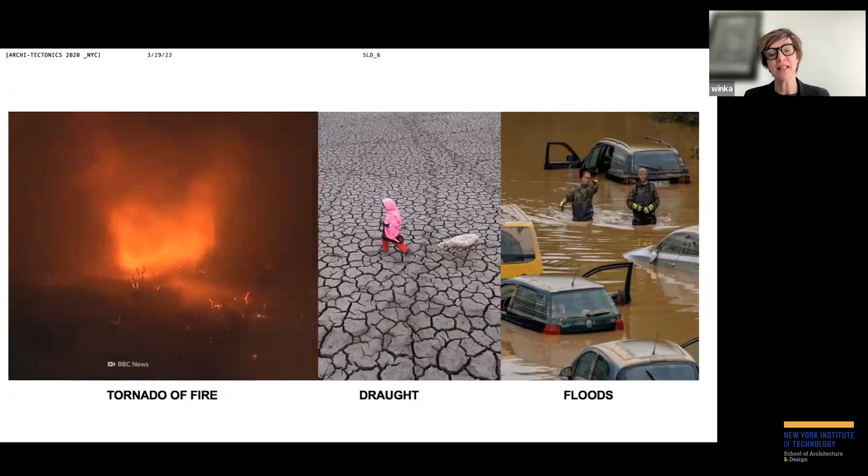It's not a manual—it is a manual, and it reflects the non-standard way we're working. Essentially, the non-standard way started very early on and was a little bit related to what we call the Anthropocene. The Anthropocene, as we know, has strange effects from tornadoes of fire to droughts to floods. So why can't we control that this water travels to countries that need it and the other way around?

We think partially as architects, we have a small part where we can maybe add some intelligence to this problem, thinking about buildings with smart skins, passive energy sources, prefabricating, which means it's clean and fast, and using renewable sources.

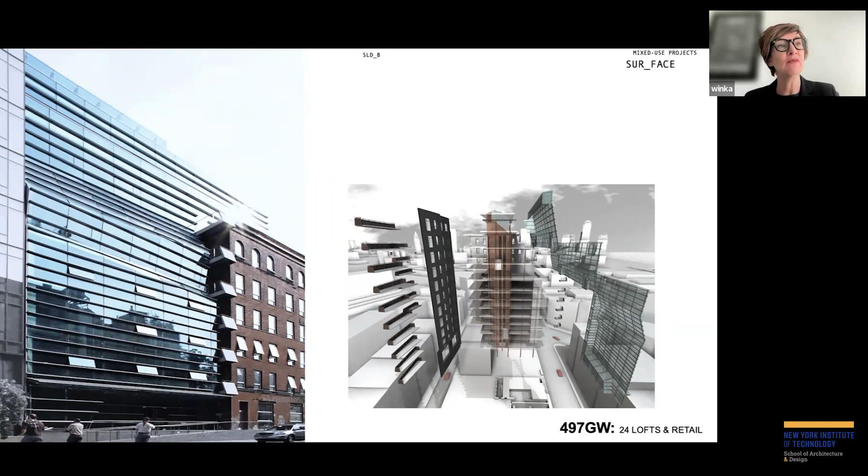So I'll walk very quickly through some earlier projects. This was a project we developed actually in the late 90s, was built around 2000. And was maybe one of the first parametric projects where, instead of construction drawings with dimensions, we sent a 3D model around with XYZ points.

We did this because the glass was extruded in Spain, the mullions, the glass was folded in Spain, the mullions extruded in Hong Kong, and the whole thing was unitized in Brooklyn.

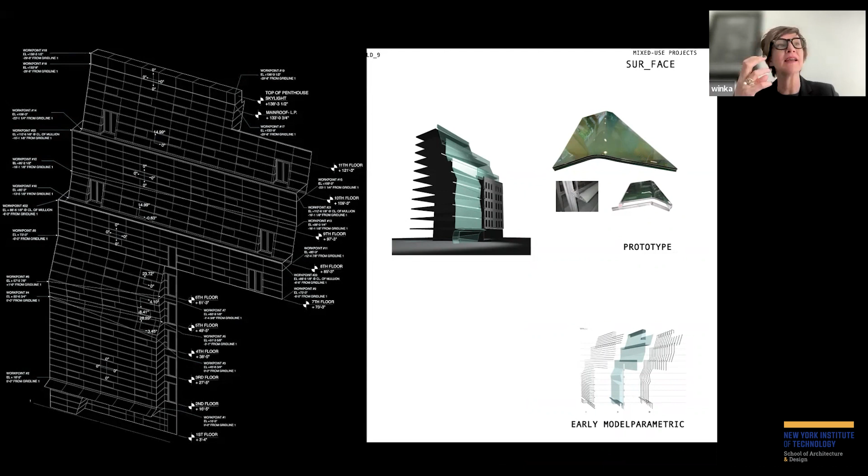Now, not only did we do that, we also felt like we wanted to challenge the original or maybe standard curtain wall notion, as this was more a customized version. And we separated the vertical and horizontal mullions in a way that on the outside, it doesn't look like grids, but like horizontal bands. This project was a very interesting one.

And the last one was also passive solar. So this is a later one.

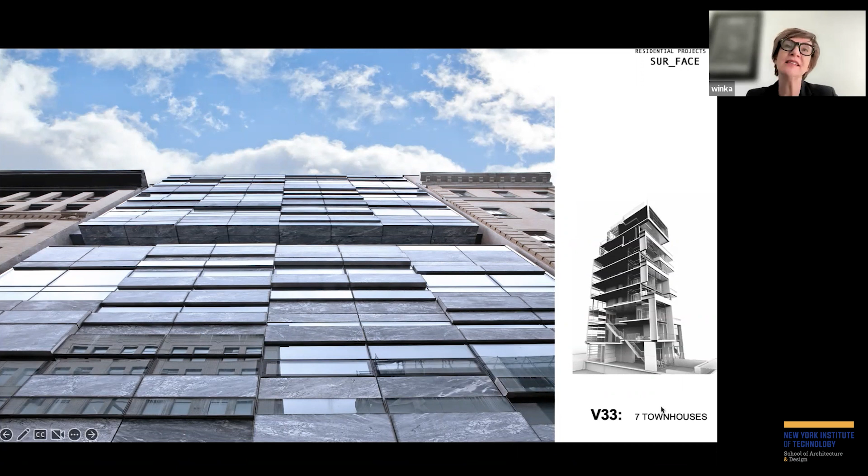Now we're moving in 2010, and this was a pixelized facade, really responding to the fact that the building is in a landmark district. And it's stone, translucent stone, glass, and translucent glass, optimized towards the north street facade with this glass and stone, and towards the south, where you have the garden with very deep balconies, which provide natural shading, and also, of course, outdoor spaces, which is rare in New York City.

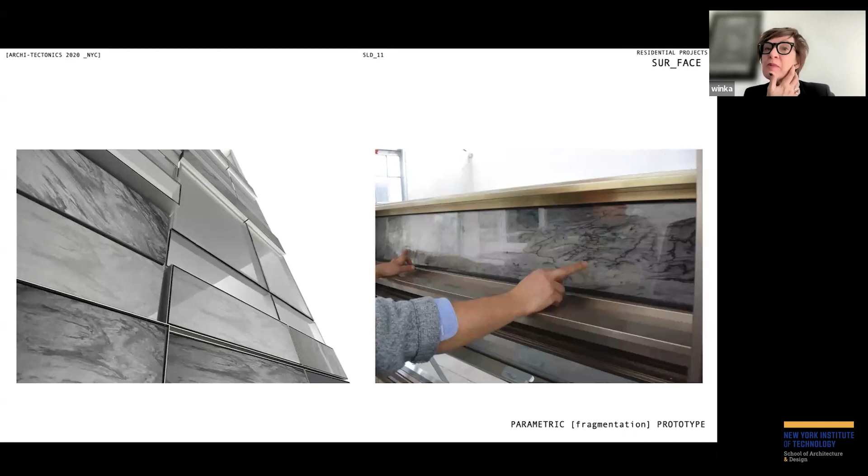This parametric facade started to show something which we have been doing from the beginning, also in the folded glass one, where we moved away from working directly with contractors. We started working directly with manufacturers, and that also embeds, instead of model making, we started to make one-to-one prototypes.

So here we're looking actually at a one-to-one prototype of the facade in Italy, where, as you can see, the mullions are ultra thin, the stone is translucent, and the facade is a 3D pixelation. This was in response to a question of landmark.

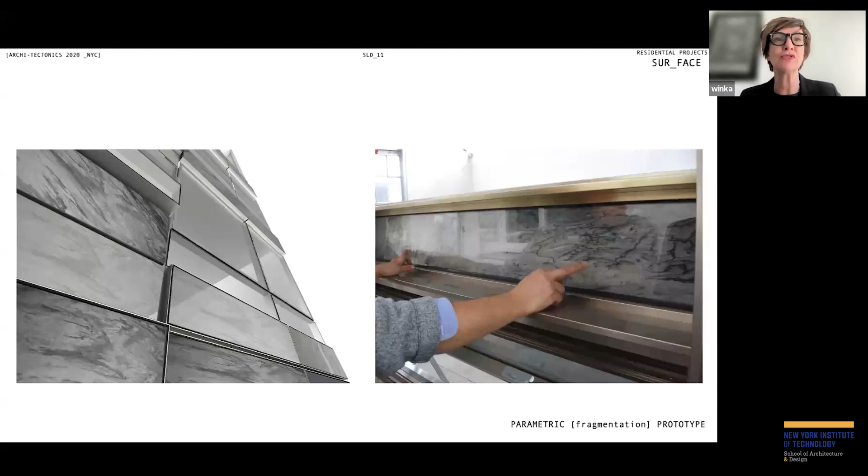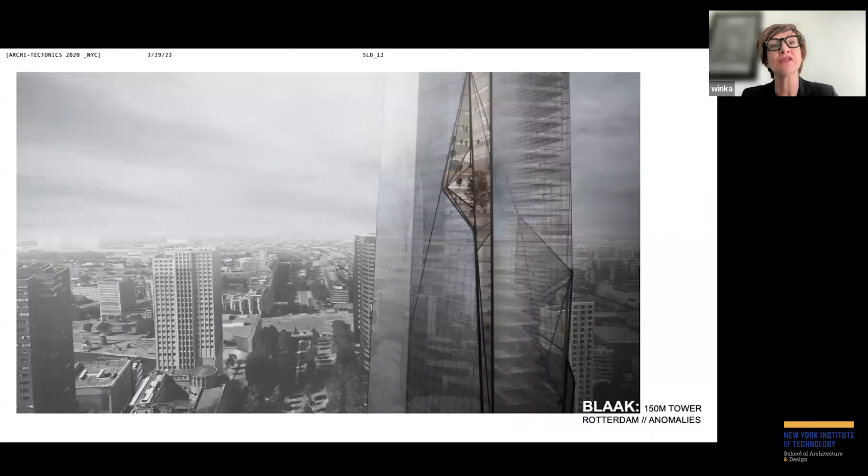Moving more towards the future, this is a tower we're working on right now in my hometown, Rotterdam, in Netherlands. 150-meter tower, where we start to look at the idea of sky lobbies as green lungs.

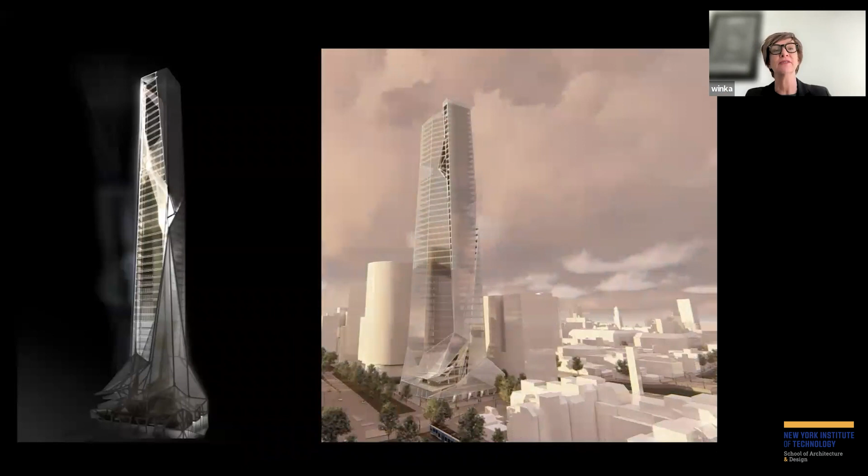And then a frit will allow the south facades to stay cool, a silver frit on the glass, and the north facades to stay transparent.

So then we move into one we just finished, a little tiny guy. So here you can see the difference in scale, actually, that we happily embrace. Our office is not traditionally going from tiny to large. We actually like to switch the mini with the mega.

And then this is the mini and the mega I'll end with. So this was actually a 4-story townhouse. We added 4 stories on top of it.

I said to the office, this is starting to look very out of proportion. Maybe we need to add a 3rd building to create actually something completely new.

And this is where the climate skin came in, which is a trellis, a solar trellis volume, really, not a facade, but a volume.

Which wraps the front kind of balconies that are leftovers from the fire escape that used to be there, and then wraps all the setbacks of the new extension and also the roof terrace and the back.

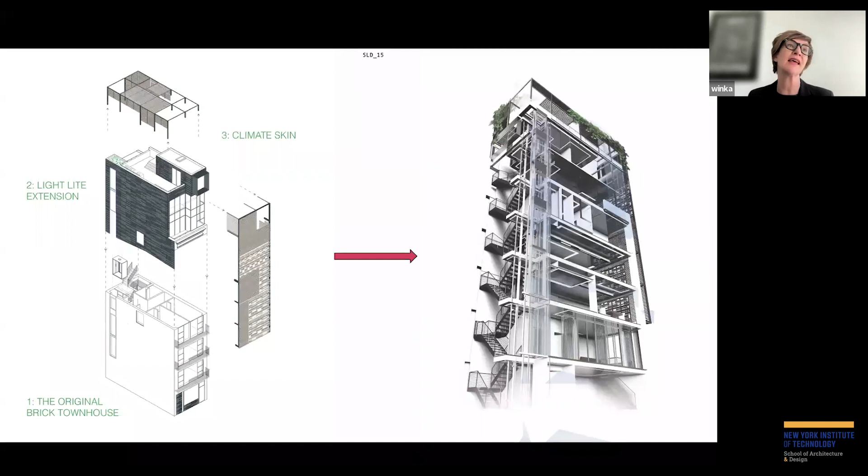So in the back, as you can see here on the right, is actually a glass elevator and stairs, because this 8-story townhouse is just for one family.

Here you see the front with the trellis, and that's on the right. You can see it's openable. And that opening we felt should be a transformation.

So we call it feathering. It's basically inspired by a bird wing, where if the bird flies, the feathers are completely aligned and very streamlined. But then as it sits down or it lands, then the feathers get spread out.

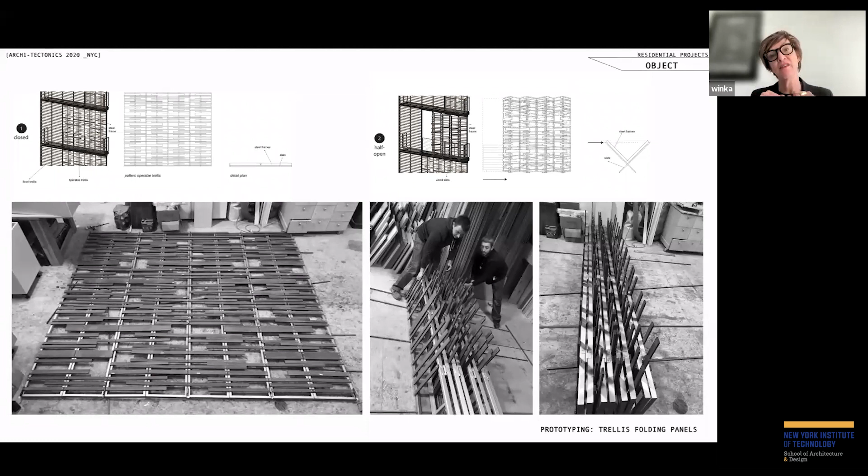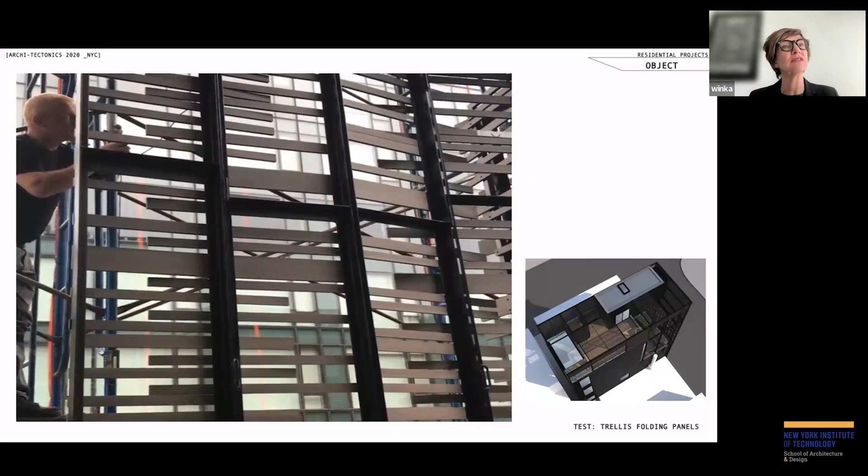So we did the same thing here. As the trellis is closed, you see here the fins move flat in space. But as it opens, it folds out. And here we're actually using an actuator to see whether we could automate the top levels.

And here you see a small close-up of how this looks for the facade, and you see the balconies. So quite beautiful is that this facade actually saves 45% energy reduction over the year, simply by opening the trellis in the winter and allowing passive solar in, and by closing it for shading in the summer and not overheating the building.

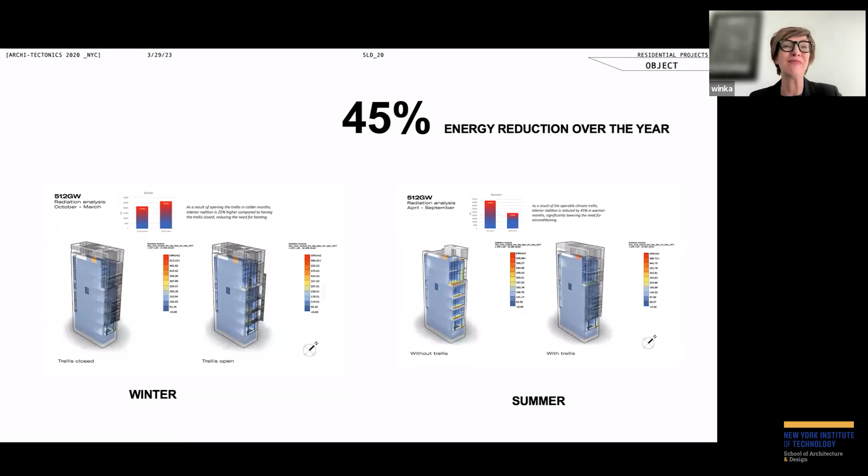A very energy efficient method, as in not using any energy. And then if we're up in the extension, you start to see the doubling of the facade.

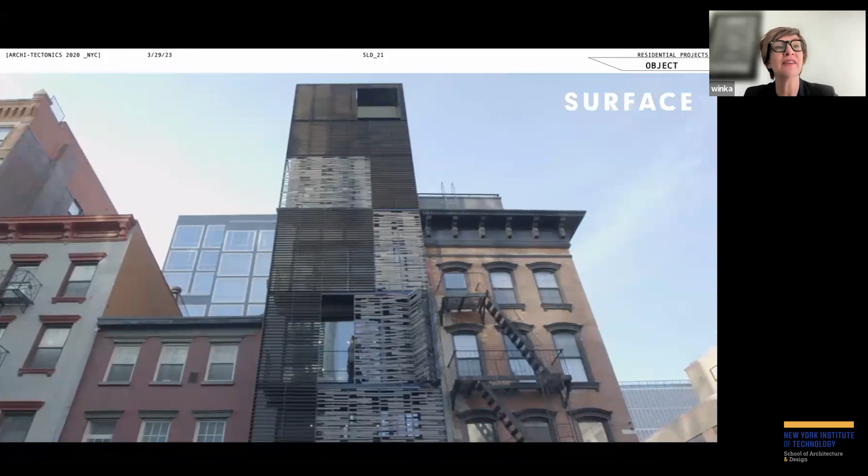Here I'm standing on the remnant of the fire escape that you still see on the right of the neighbor. So the right neighbor is actually more or less how our building used to look before we added this kind of towering trellis. On the top, what you see, that square window is actually a meditation corner.

It looks out over Soho in Manhattan. You can find both these buildings on Greenwich and Spring in Manhattan. And then the beauty is, of course, a 3D trellis that you find this room on the top, which is really a roof terrace, but very private.

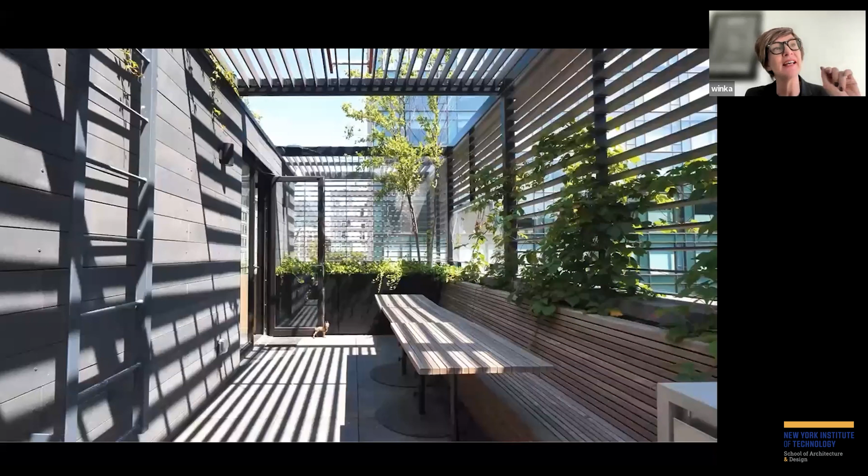The weirdest thing about roof terraces in New York is they get very, very hot and they're very, very unprivate. So here we allow plants to grow over. On the left side is the little bulkhead that contains a bar and a kitchen, and has a vegetable garden on the roof. You see the little ladder going there. So it's like a little green oasis.

So going back to the Anthropocene, when we look at the climate as it is now, nearly 50% of the US population, an estimated 150 million people, live in areas that don't meet federal air quality standards. Particulate matter is single-handedly responsible for up to 30,000 premature deaths every year. According to the latest World Health Organization report, 8 million people die every year globally because of air pollution.

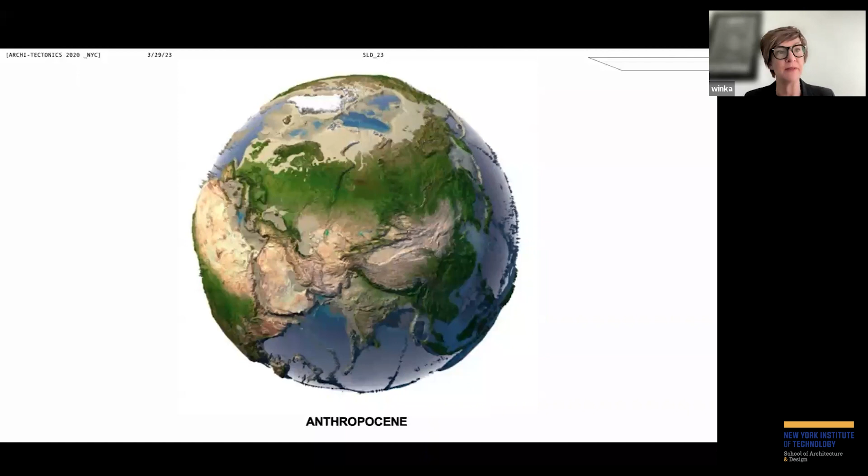Basically, radical mutants, or hopeful monsters, as they're called by geneticist Richard Goldschmidt, who relates this to evolutionary biology, means that these flowers undergo fasciation or cresting, a relatively rare condition of abnormal growth in vascular plants in which the growing tip, which normally is concentrated—a flower is typically symmetrical—starts to produce cylindrical tissue elongated in the direction of growth, creating these flattened ribbon-like crested or elaborately contorted tissues.

Now, why is Richard Goldschmidt calling these hopeful monsters? He does that because he realized that the mutation actually allows these flowers not only to create this very strange beauty, but also to survive this stress in the environment.

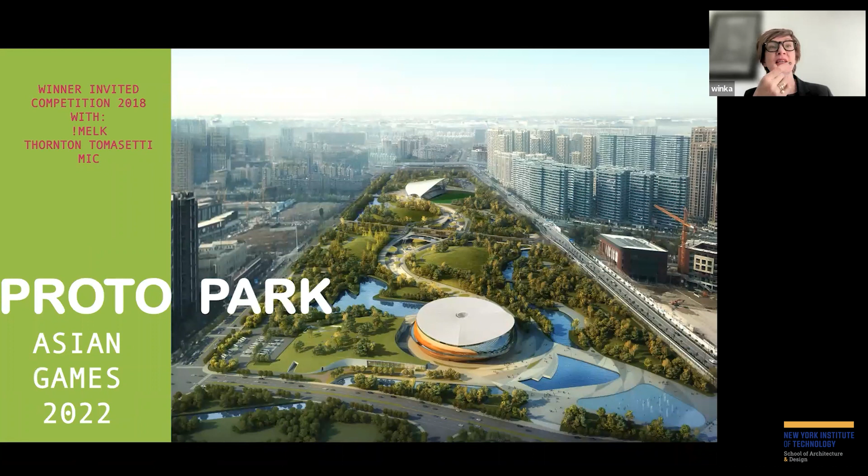We call it a proto-park because we don't see the park here as a park just for the Asian Games. You have to think the Asian Games are the Olympics of Asia. And essentially this 116 acre park is 1.6 kilometers, or almost a mile long. As you can see here, it has 2 stadiums.

Now, there's a few interesting things we did to change the dynamics of making a stadium. As you know, a stadium is usually kind of a white elephant in the city. It is really active for a very short amount of time, causes traffic jams, massive overload on the neighborhood, but then it stops for most of the year.

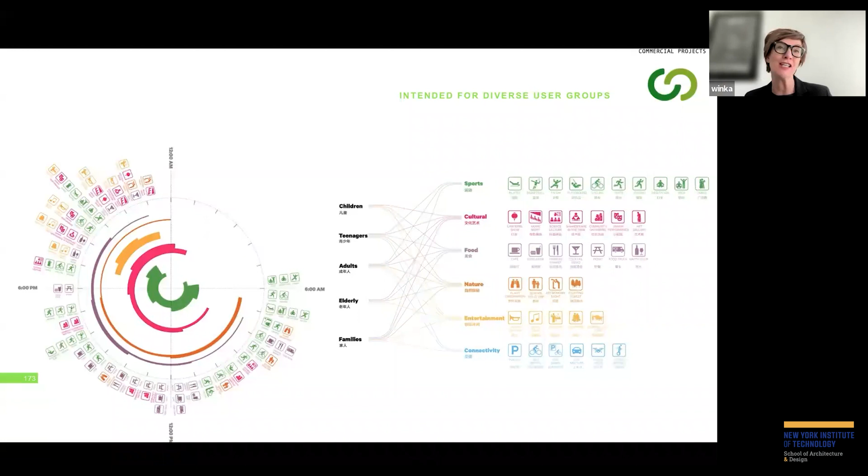So we proposed to the client to actually look at both the park and the buildings as something that would have use after the games. We were, of course, a bit opportunistic here because we were interested in making more interesting buildings than just a stadium that is a bit of a one-liner, in the sense that what you see on the outside is what you get on the inside. So here you see the evolution of our thinking about the park.

This was designed, the master plan was co-designed with Melk, a landscape architect here in New York City. On the left is what they asked. We broke the rules. They asked us to put the 2 stadiums on the bisecting road and river in the middle.

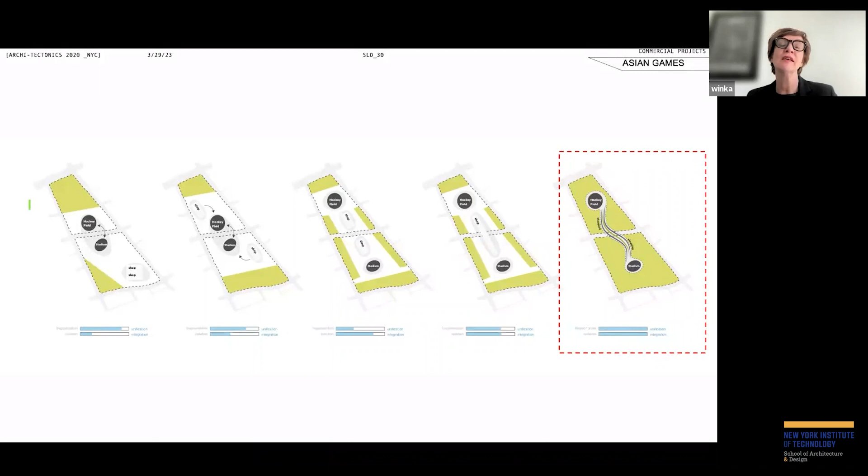We realized if you do that, the park becomes the backyard, so we proposed to put the stadiums in the centers of each half of the park, allowing them to be connected by what we call a valley, a shopping valley or valley village, a 530-meter long shopping corridor that goes under the river, now an aqueduct locally, and under the road, connecting the 2 stadiums as one activity network, and also because that artery would activate the park long after the Asian Games are gone.

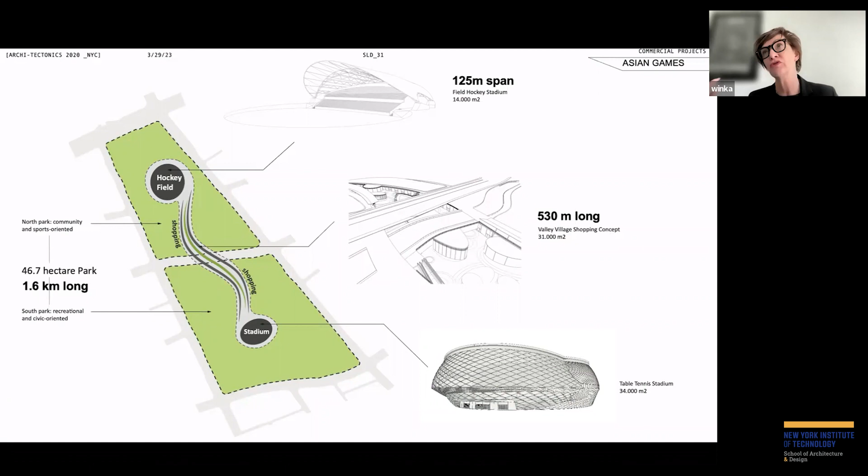On top you see the field hockey stadium with a spectacular 125-meter span solar wing, and the table tennis stadium that is a hybrid concert hall of 34,000 square meters, about 350,000 square feet. Here you see how this looks now. It's extremely green already.

As you can see, the aqueduct is in play, and we have these long loopy pedestrian bridges going over the river and the road as well. The road is actually quite a large road, a 6-lane highway, which in China is quite normal. We're in the center of the city, but they tend to have really large roads.

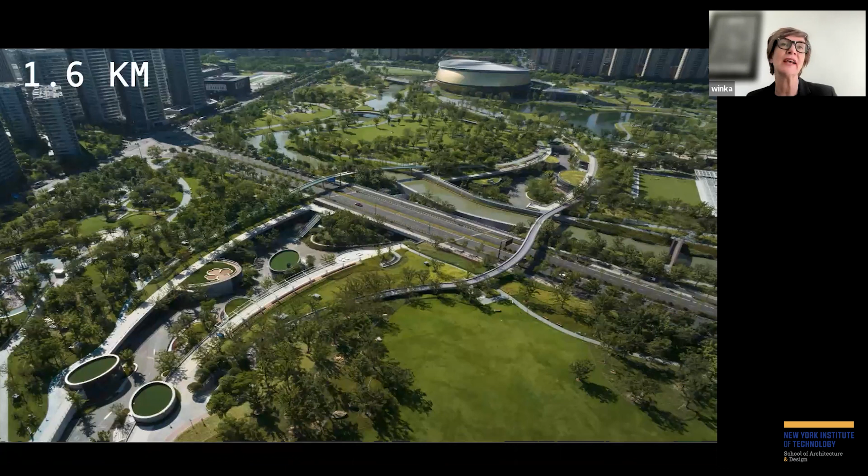The shopping valley has these pavilions with green roofs and solar wings that give the solar energy for the valley village, so it's always lit.

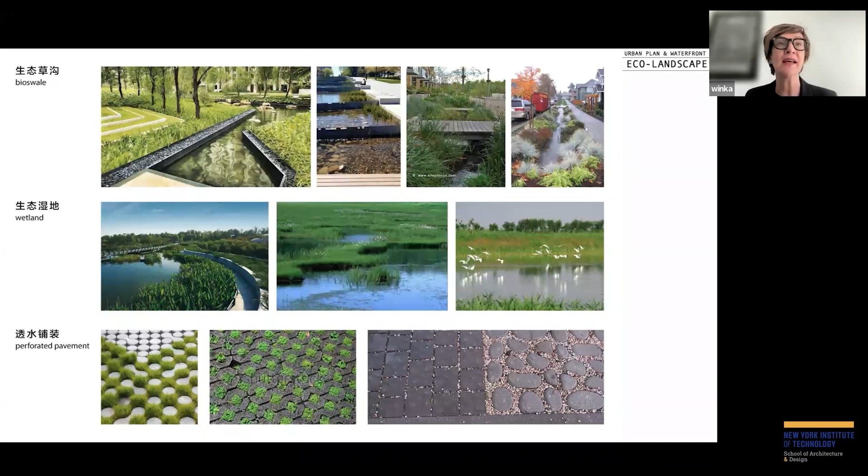The park itself we developed as an eco-landscape with bioswales. We reconfigured the wetlands that had almost completely disappeared in the area, and we use only perforated pavement so that the hardening of the city around is absorbed here. The water is absorbed here and also retained for the future, so there will be water when it's seriously dry around.

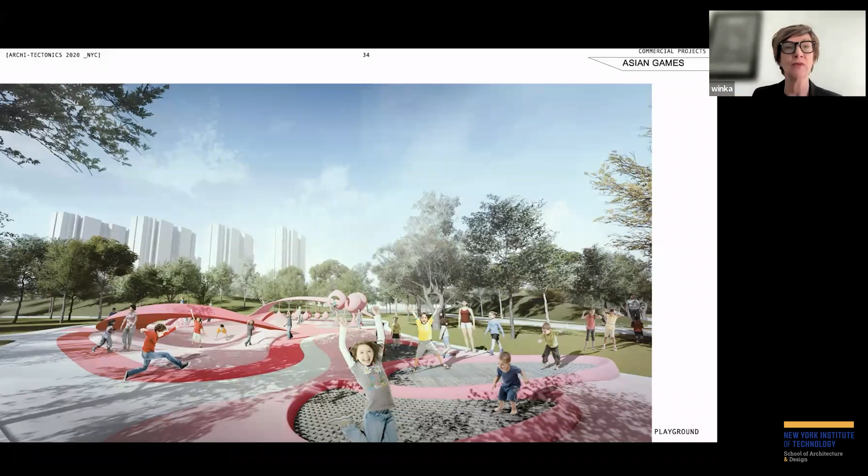And because it's a park for the future, it has playgrounds, outdoor arenas, sport fields, and all kinds of other things. As you can see here, people are actually currently camping in it. It was quite a lovely set of social media images. On Chinese social media it's quite hilarious to see what people are currently doing in that park.

The Valley Village retail, as I said, is extremely long, about 200,000 square feet. Here you see a bit of the structure of the solar awning and how it connects to the lower pavilions.

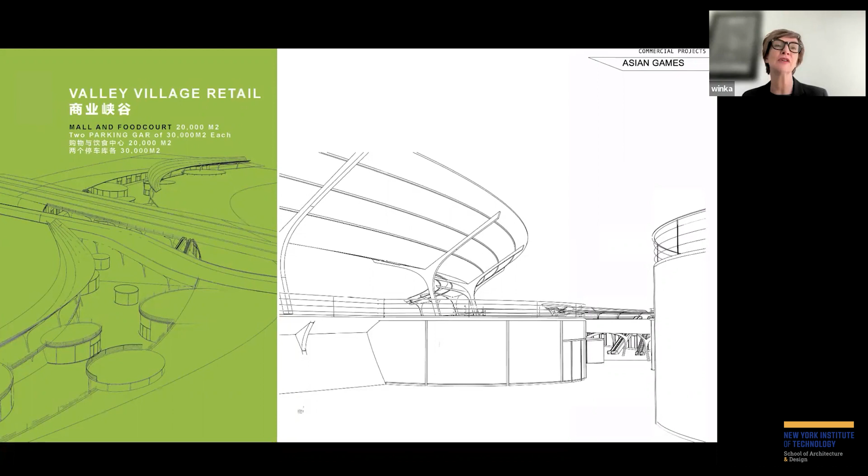Something else we used, another sustainable method, is the zero earth strategy. It's a super simple method: when you excavate the wetlands, the new wetlands and the new Valley Village, rather than removing the earth, we leave it on the site, allowing the parking garages not to be so deeply recessed.

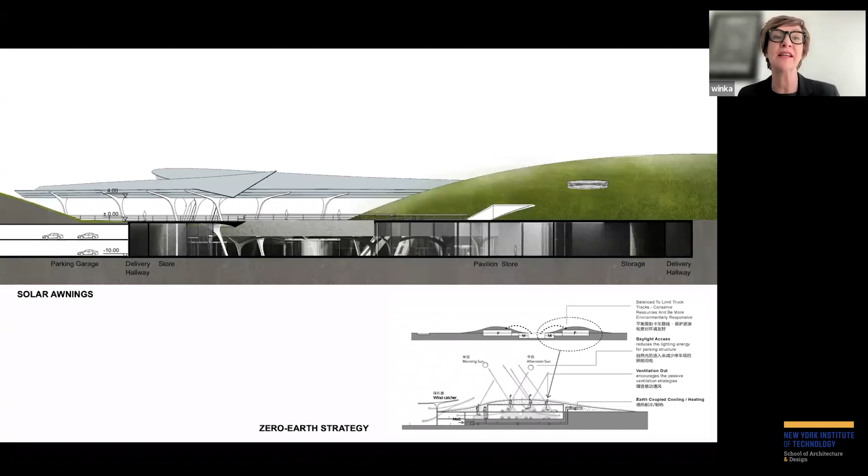One thing I didn't say is that it's not just two stadiums and a Valley Village—there's also 2 parking garages, a visitor center and a fitness center. So it's actually 7 buildings and a park. Here, sometimes we have up to 20-meter, 60 feet high hills, but in the hills you'll find little skylights to allow for natural air and ventilation in the parking garages, and also for the fitness centers.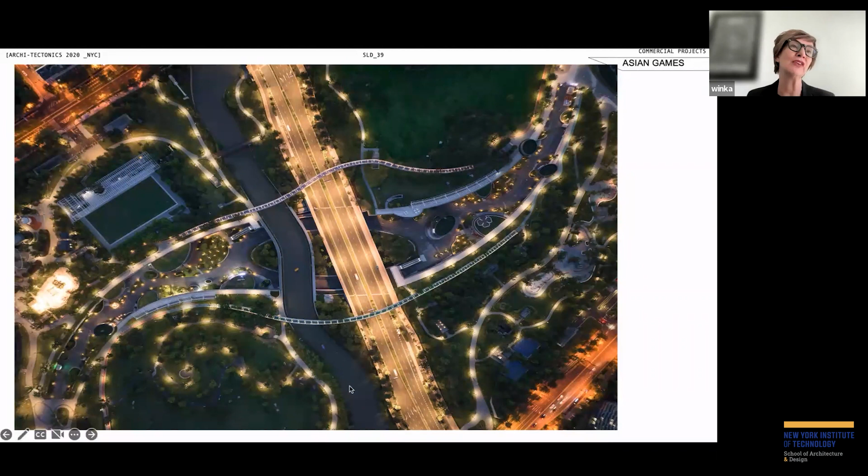I've been thinking why this happens. I think one reason was that we proposed hybrid buildings for the future, so we were allowed to invest more money. The second was time pressure—they just didn't have time to change our drawings, so they had to build what was on the drawings. Also funny is that I drew a curved line, for the same lack of time, just following the river as it naturally went, and they actually literally built a curved aqueduct. That was a bit of a surprise, you could imagine.

Then here we're down in the Valley Village. We have not escaped the Starbucks that has landed here already, and it is majorly used already. Now we're on the higher level looking at the solar wing as it is starting to collect energy. It's a solar film, so it's also slightly translucent.

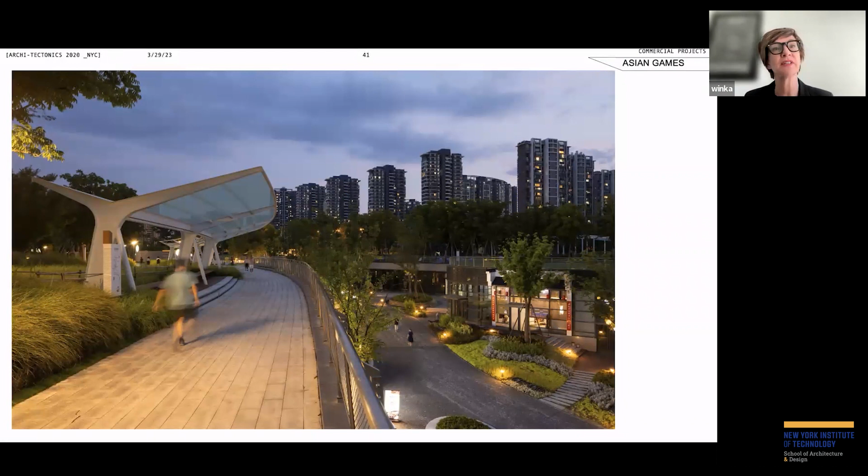So the stadium design, as I said, is a field hockey stadium, outdoor. We decided, as everything is hybrid, to also make this building more of a topological or topographical landscape feature by recessing the field in an oval 5 meters deep in the site where the seating is, then tilting the landscape up around it so that at the other end it's actually flush with the path.

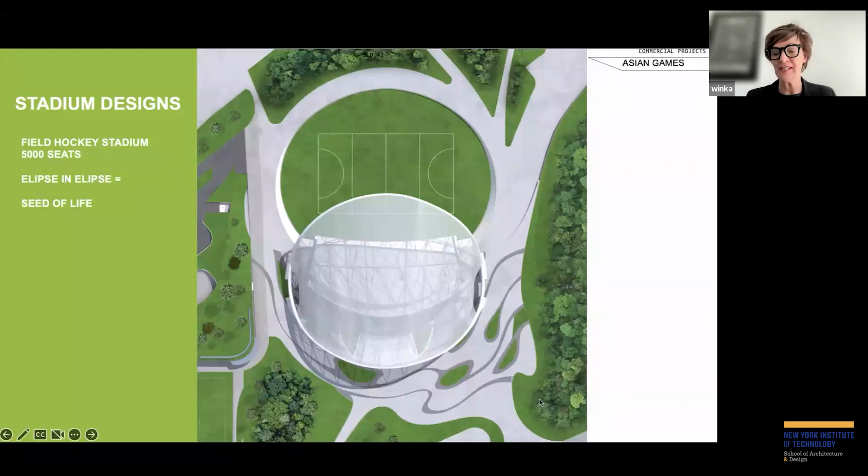It's a 5,000 seat arena. This ellipse in ellipse, as you can see in the roof, is an ancient diagram called the seed of life, which is kind of nice as a thing to know. And the building is a very simple design.

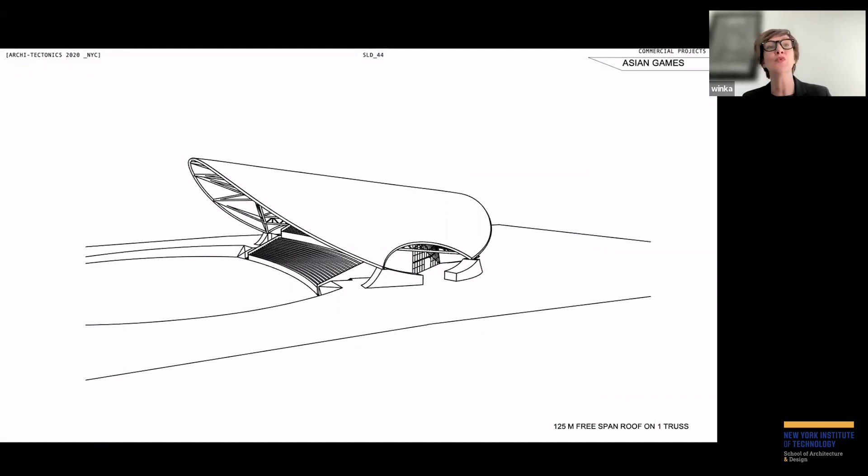We curved the arena for better viewing angles, and then the area under the arena really became the lobby, and we curved the facade with that. It's covered by this enormous wing, 410 feet in one span with one truss, with a very light fabric on top of it.

What is actually interesting is that rather than worrying about the structure of it, we had to worry about it not flying off. So these concrete abutments you see here are really to hold the thing in place rather than having it fly off.

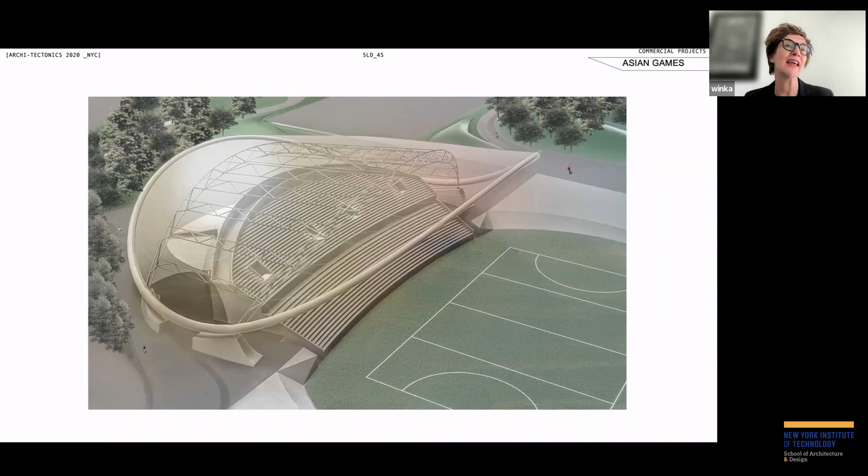As I wanted mostly cables in this roof, the engineer explained to me I had to put a tension ring around it. At first they said I might not want that, because the ring goes from 1.5 meters to 1 meter diameter, which is 5 feet to about 3.5 feet, which sounds enormous. But when we drew it, because it's almost 400 feet long, it turned out that was perfect in proportion. So we said, go right ahead, we love the ring, let's do the ring.

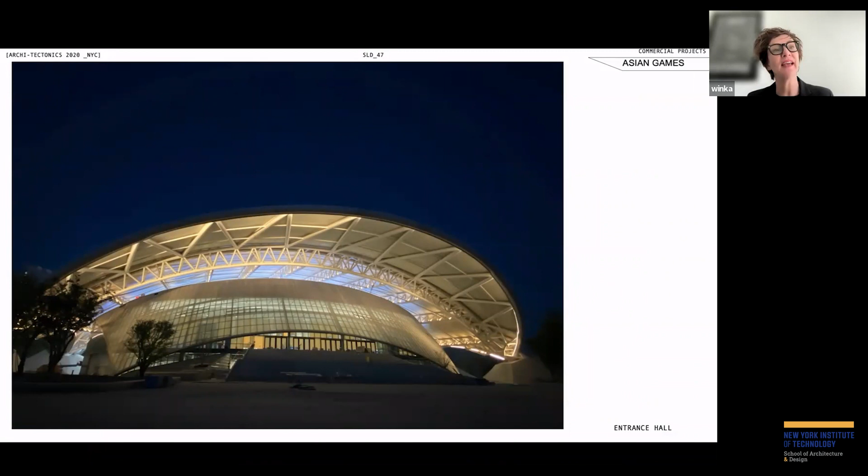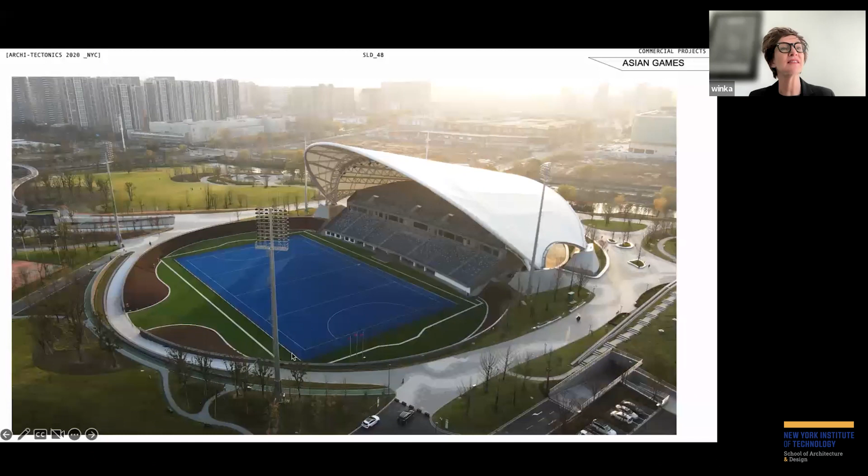Here you see the roof at night with the lobby, and then how it sits as a landscape. So we made these kind of sloping berms around to give this thing—but as you can see here, it's completely flush, so you can easily come out. The curve is quite beautiful as the grass sits on its edges.

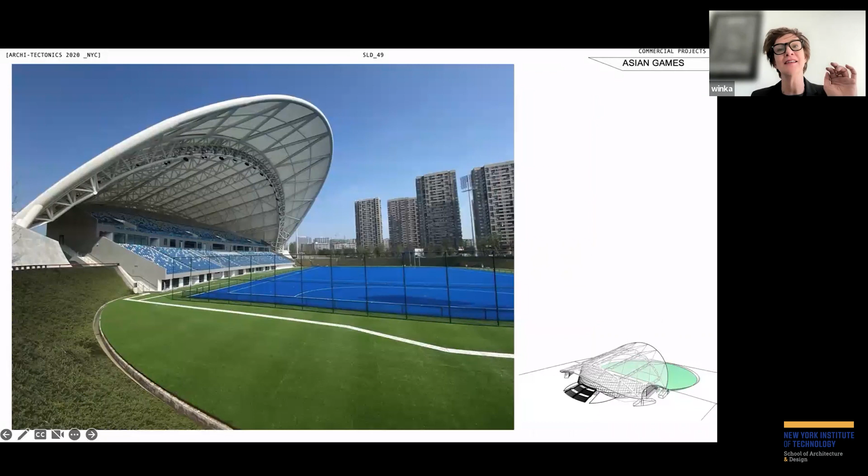In my head, these concrete things you saw here—these little guys at the foot of the wing—had become kind of my height, you know, 6-7 feet. But as you can see here, they're incredibly much higher. So I look forward to going. Then on the bottom right here, you see the pedestrian bridge flying by.

The other stadium is the one here in the front. It's the hybrid between concert hall and a stadium, and behind it is actually the fitness center that is connected to it underground.

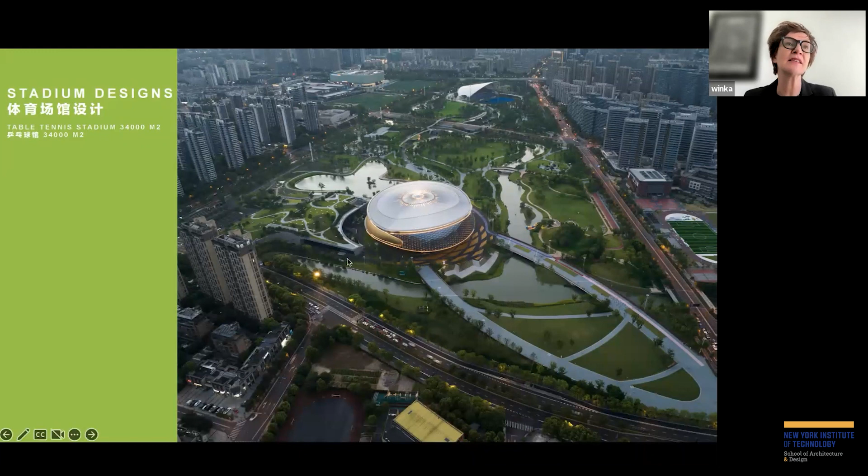You can see why this park looked completely green in that first photo—it's because all the buildings, whether the fitness center, parking, visitor center, or the other parking, are all under the landscape. There's literally something like 1.5 meters of earth on top so that trees can grow, and only slivers of glass are apparent at some points, coming out of the landscape. So how did we think of this shape?

We realized we wanted to make it not a singular shape, but something more mutant that reacted to the stresses of the environment and the stresses of having to be a hybrid. We were of course inspired by flowers and the changing of the essence of the shape, but we also looked a bit at this thing called the cong, an artifact found in ancient graves that is traditionally revered as quite important.

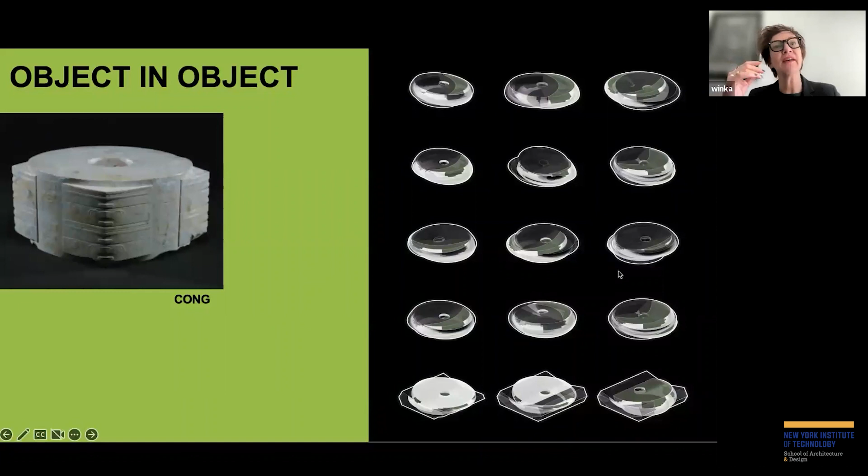So we started literally with looking at a square shape intersecting with an oval, but then we realized we wanted it more self-similar. So in the end we made it like two intersecting ovals that were slightly offset, to really allow the mutant character to incorporate not only intersections on the inside, but to also allow exterior spaces to appear.

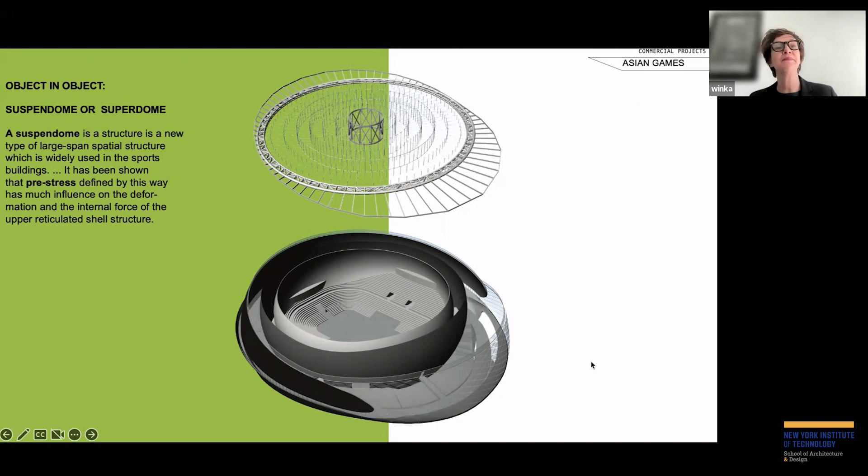What was also really important for this hybrid is that it was super adaptable. We made it super adaptable by introducing something called the suspendome, which means it's a roof that has an extreme height in the middle and then self-spans itself to the inner walls and cantilevers out to the outer bowl. So this is a cantilever, and that carries one of the rings. The two rings of these intersections had a closed facade clad in brass shingles, and then a glass diagrid facade, steel and glass. That was the other circle.

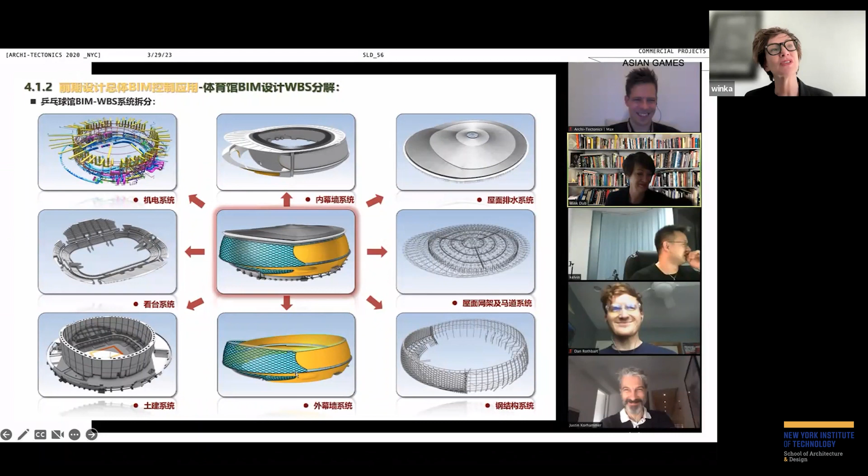Here we are. So what was amazing about COVID is that the BIM guy from the contractor contacted us. This is the guy here in the middle. He had found that he really loved the buildings and had never seen anything like it, and was trying to understand it and had some questions. And basically around his boss, I think, contacted us. So we had these meetings with him discussing how to make this intersection of the two volumes, how to create the suspendome, which is essentially a radial grid, and how to intersect all structures and mechanical in there. He also helped to prefab the whole thing.

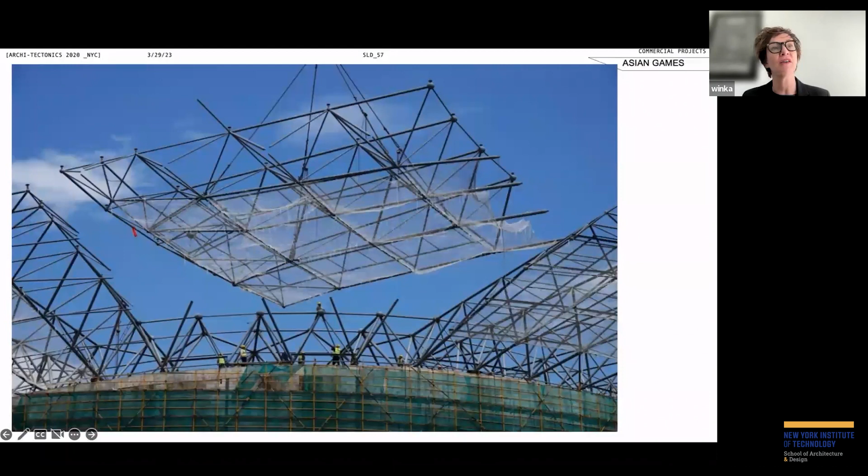So this whole roof of essentially a 350,000 square foot building is lifted in place in only, I think, 8 or 9 chunks like this, and then with tiny little cranes held up in the air while they're being connected.

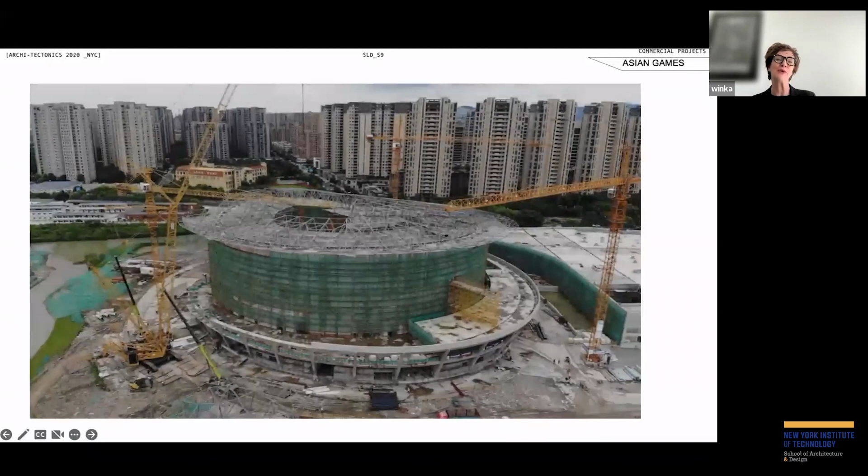And I have this little movie I wanted to share with you, because the way they did that was quite stunning to us. Here they are lifted in the air, but then you see these people literally connecting the dots, as they say, locally at these points.

Thornton Tomasetti was our engineer who helped us think through these things, but it also rendered the building completely column-free. So the column-free being important for the flexibility.

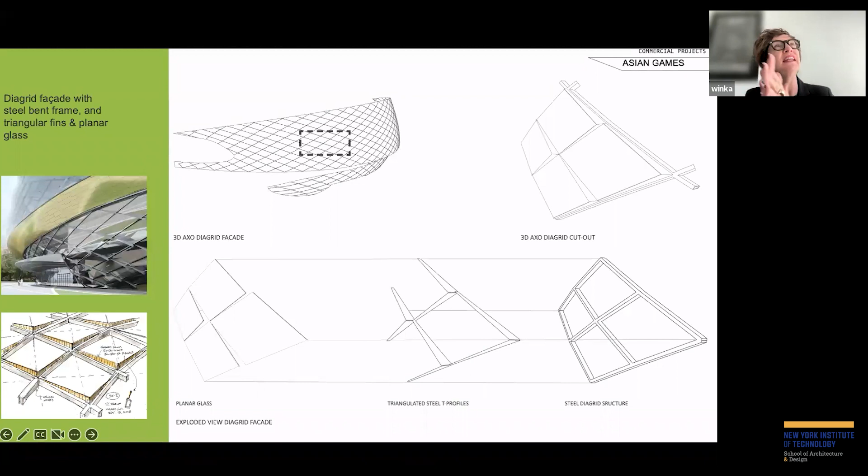The diagrid, we were helped by a very famous engineer in New York City called Israel Berger, Bill Logan. He's a sailor. It's my favorite engineer because he thinks dynamically. And I asked him, I want to keep this diagrid planar, because one, I don't want to make this double curved building super expensive, and two, I think it's more interesting to give the double curved facade a lot of texture. Because what started to happen is that the calculations of the brass shingles that we also optimized, I think the 5,000 pieces only in 85 different shapes through parametric design.

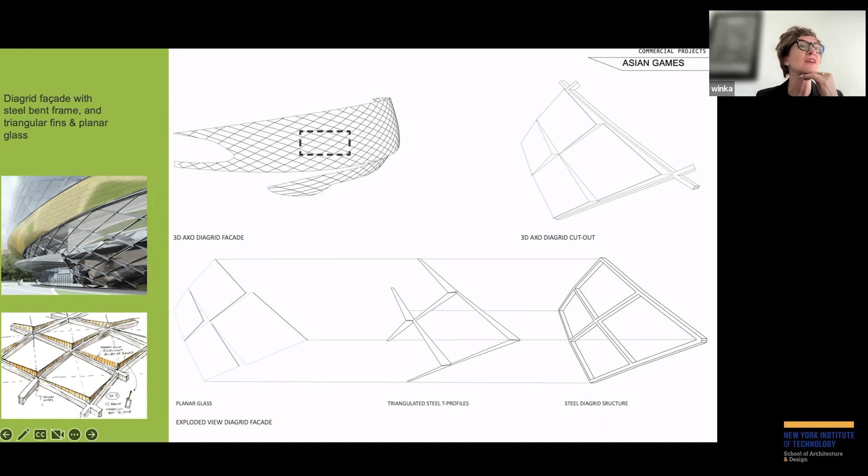We also wanted to have the glass facade have a lot of texture. So as you can see here, we kept the glass planar, but then designed little silver eyelets, triangulated steel profiles that support the glass, which then gives the facade quite a bit of texture. But again, as you see here, because it's so large, these are very small eyelets. But the nice thing is they light up when the sun hits them, so they have a really beautiful shimmer in the facade, and it's very 3D.

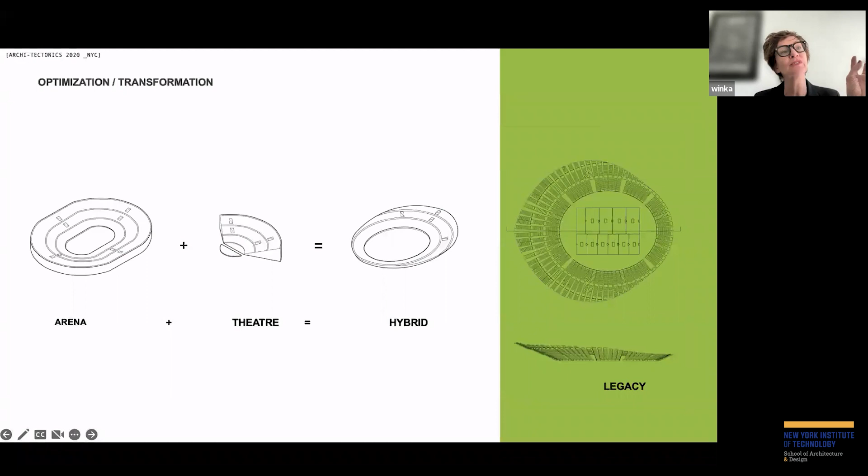Of course, the hybrid nature also had to happen on the inside. So we looked at arena seating, theater seating, and made a hybrid for it that we then developed under this suspendome. So here the interior is under construction. There's actually a skylight on the top also to give natural daylight, reflected by the circle in the middle, or deflected I should say, and fresh air also, and the hot air is also allowed to escape.

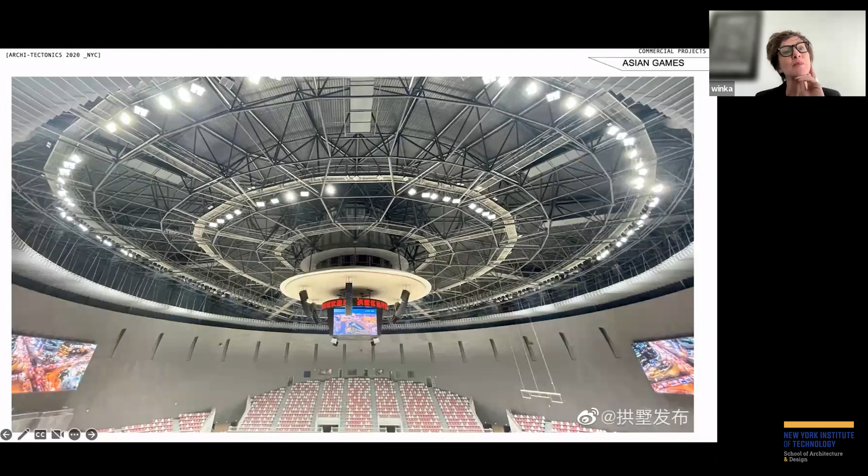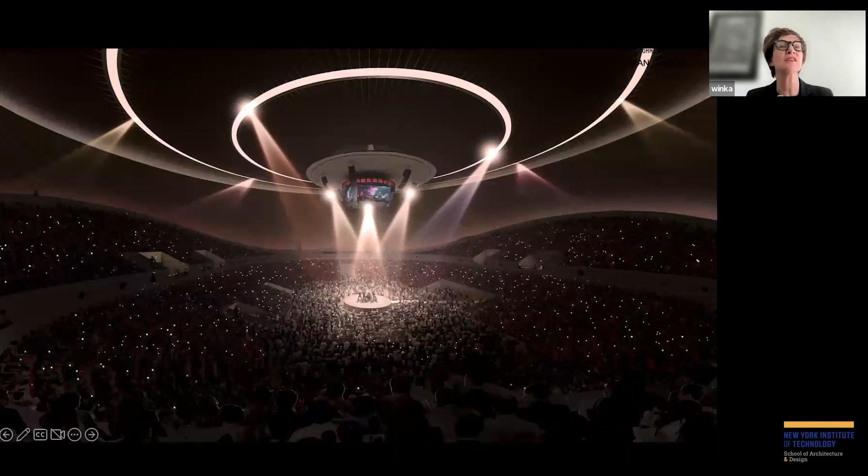We only have air conditioning under the seats to make the building super efficient, and as I said, the hot air just escapes. So here you start to see it becoming closer to completion. And then the idea is that you can have classical or modern concerts here in the same space by just changing the seating a little bit. And the lighting is already completely ready for this.

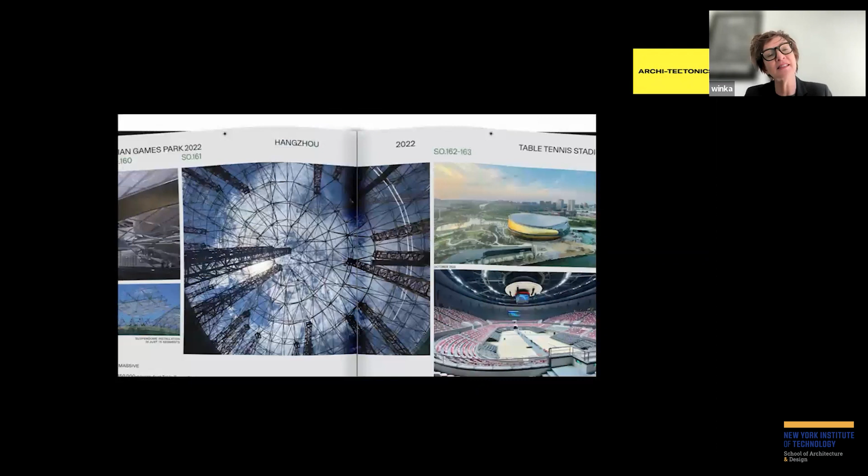So yeah, the book, as you heard, is out. It came out at the end of '21. Manuel de Landa was so kind to write a really great text on it. As I said, it's a manual. It really describes why we think you can innovate in architecture by working through manufacturing and prototyping rather than presentation models and working only with the contractor. Thank you.